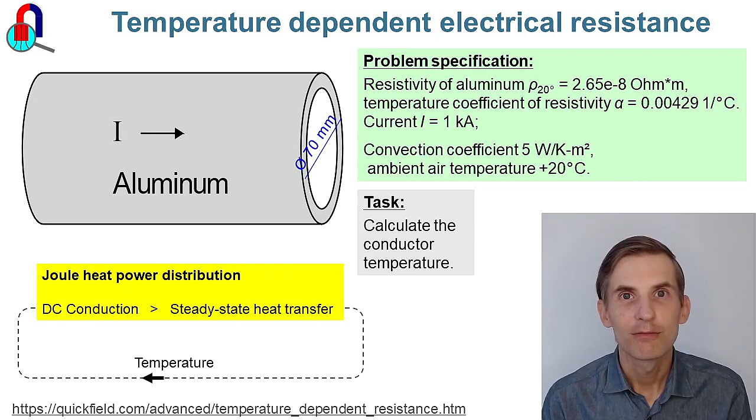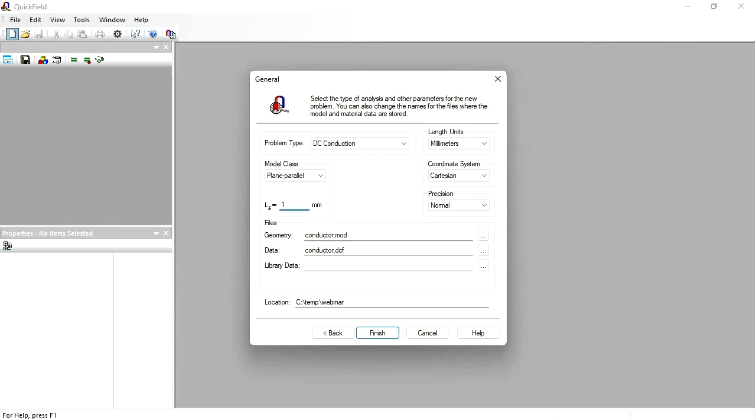Okay, let's start QuickField now and see how it could be done. In QuickField, I create new problem, conductor. Next. Problem type is DC conduction. Plate thickness is 1 mm. Length units are millimeters. Finish.

On the left you can see the problem pane and on the right is the geometry model editor window. You can draw the geometry model here or you can import the geometry model from an AutoCAD DXF file. The model is simple, so I'm going to draw it from scratch.

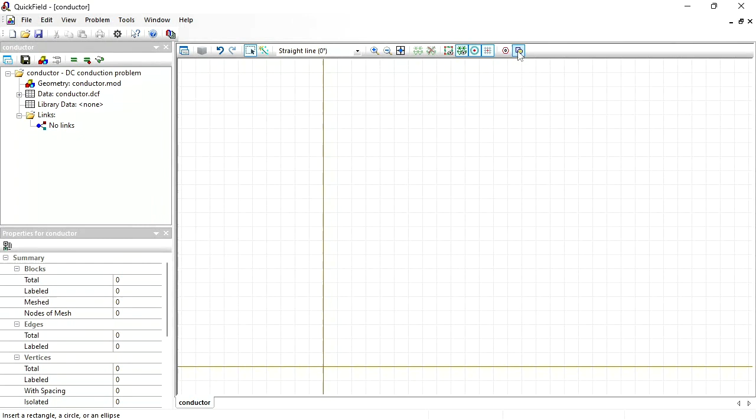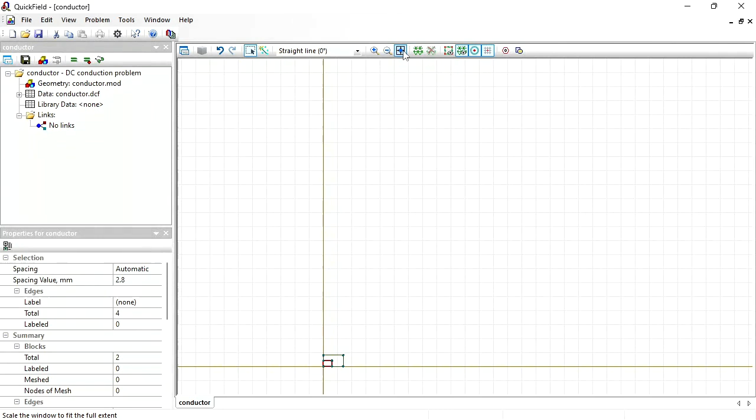First, I'm going to insert a rectangle with the dimensions 70 by 40 millimeters. Insert, and another rectangle with the dimensions 30 by 20 millimeters. Insert. Close. Zoom to fit. Now here I should switch to insert mode and add arcs, and I'd better adjust the grid settings to 10 millimeters. Switch to select mode and select and remove unnecessary parts. Now this is the geometry model.

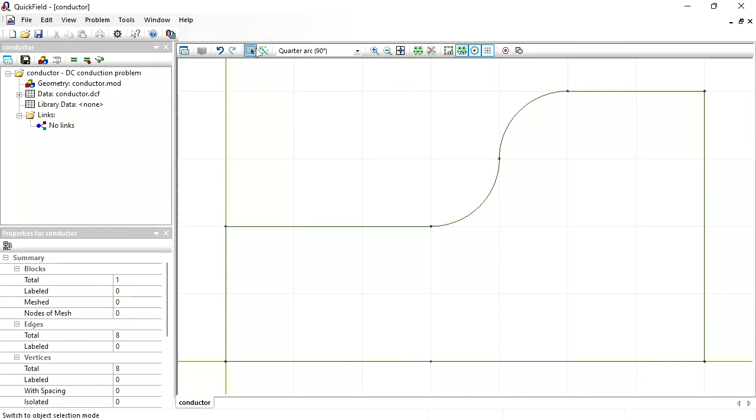Now let's assign labels. Through labels we can distinguish geometric objects and provide material properties. Switch to select objects mode, click the object to select and type in the label name here. This is conductor. This is the grounded electrode, and this is the electric potential electrode.

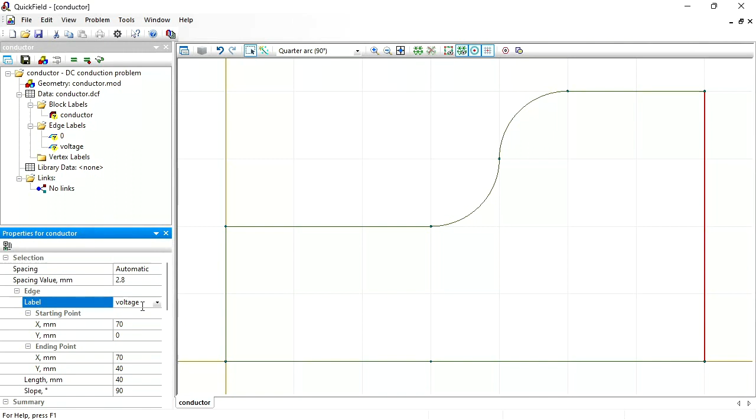Now let's provide physical properties for these labels. Double-click the label name in the tree. The grounded electrode has 0 electric potential. The voltage electrode electric potential is 0.02 volts, and for the conductor I specify electrical conductivity, which is 1 megasiemens per meter.

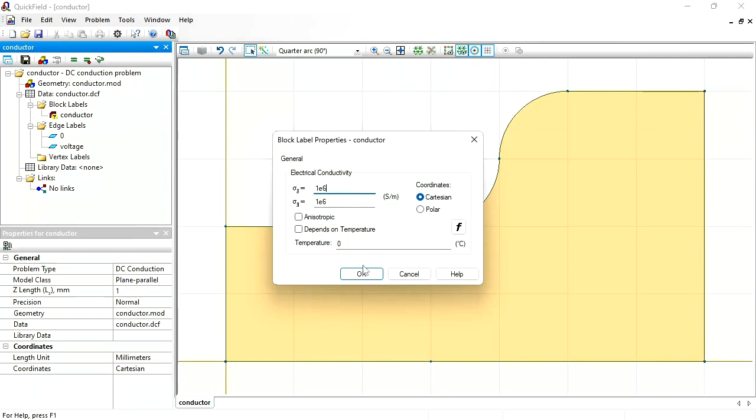Okay, before I start the analysis, I should build the finite element mesh. Just press this button and the mesh will be generated. Now save all problem files and solve the problem.

Let's take a look at the results. You can see the current density distribution, and it is not uniform. So the Joule heat distribution is not uniform as well. So I might expect to get a non-uniform temperature distribution. Let's calculate the temperature distribution.

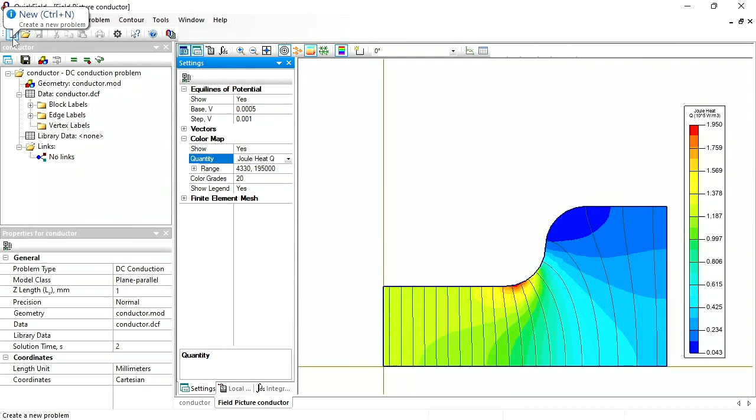I create new problem, conductor temperature. Next. Problem type is steady state heat transfer. The plate is thin, so it was possible to simulate the electric problem as a two-dimensional one, but for the thermal analysis, I need a 3D model.

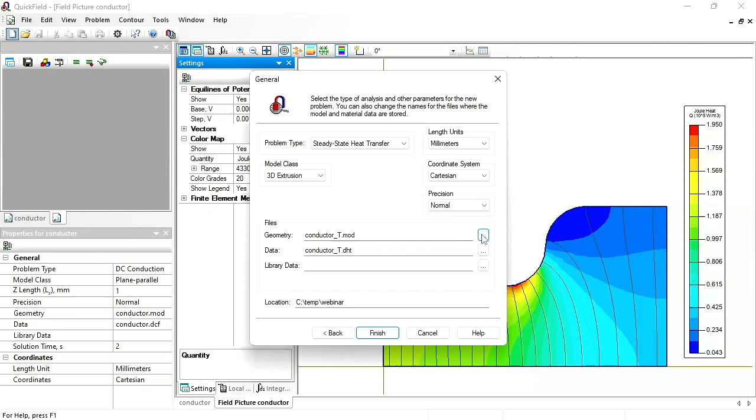The model class is 3D extrusion, and to save time on geometry model creation, I'm going to reuse the geometry model file. So I click the Browse button and look for conductor.mod. Here it is.

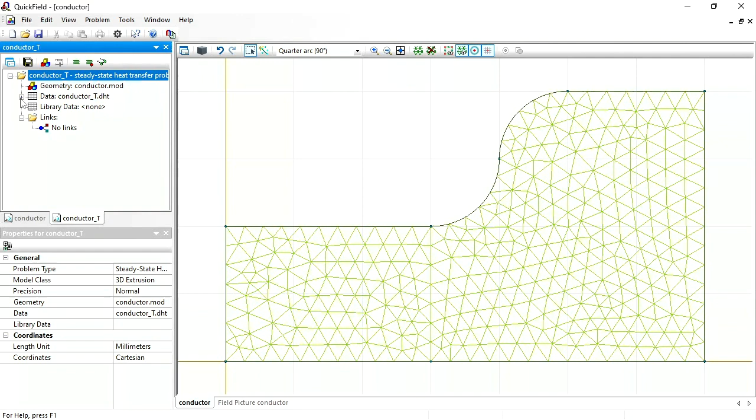Finish. To create a three-dimensional model from this plane sketch, I should assign levels to the objects. Click to select. Here you can see the levels 0 and 1000 millimeters. In fact, the conductive thickness is only 1 millimeter, so I type here 1.

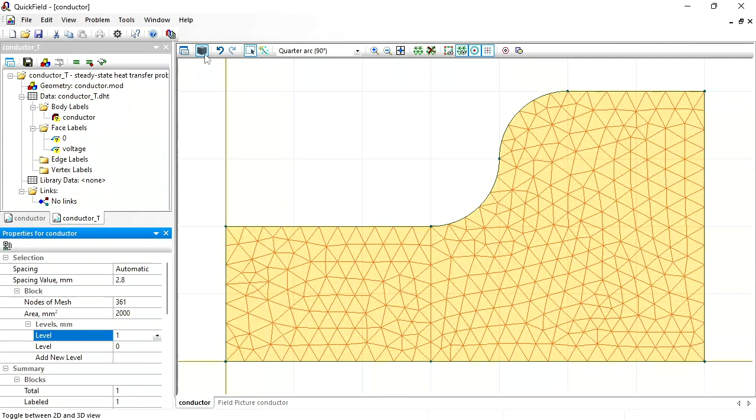Now I can toggle the two-dimensional, three-dimensional view. And here you can see the three-dimensional model.

Here again I should assign labels. Click to select and the face is selected. To select the body, I should click the selected face again. Now the body is selected. This is the conductor, and the thermal conductivity of the conductor is 50 watts per Kelvin meter.

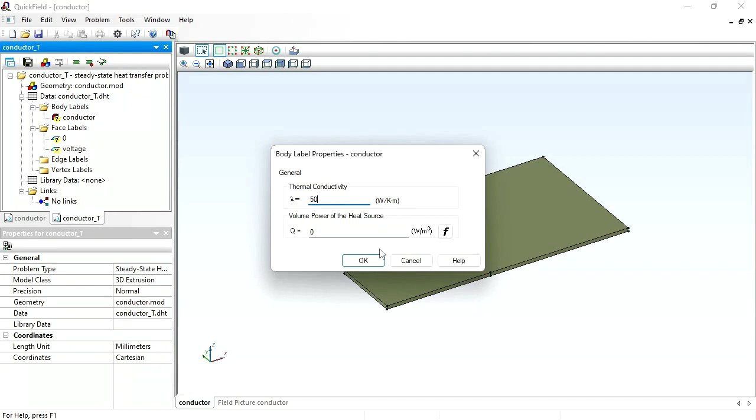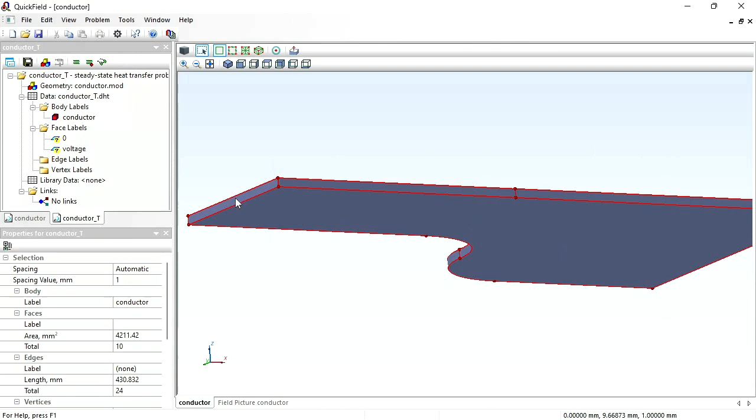Okay. Now this conductor is cooled on all faces, all but the conducting faces, cooled by the air. So for all these faces, all but the conducting faces, I should assign the convection boundary condition. Faces, convection. Ambient air temperature is 0 degrees and the convection coefficient is 10.

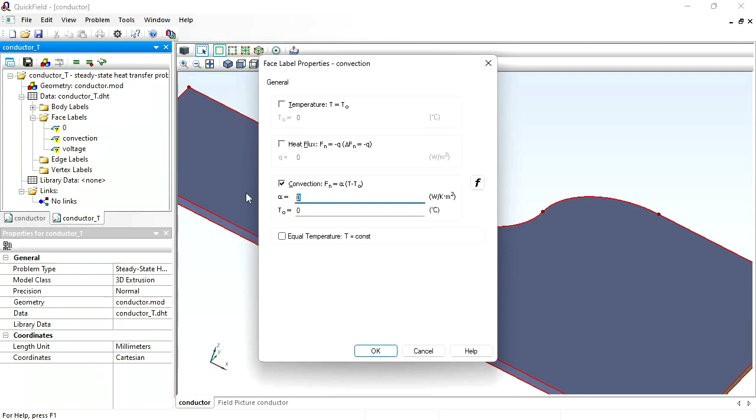These labels were used in the electric problem. I do not need these labels here, so I just double click and do not specify any properties here, and click OK. So now you see the 0 mark next to the label name. That means that this label doesn't hold any physical properties and it doesn't affect the results.

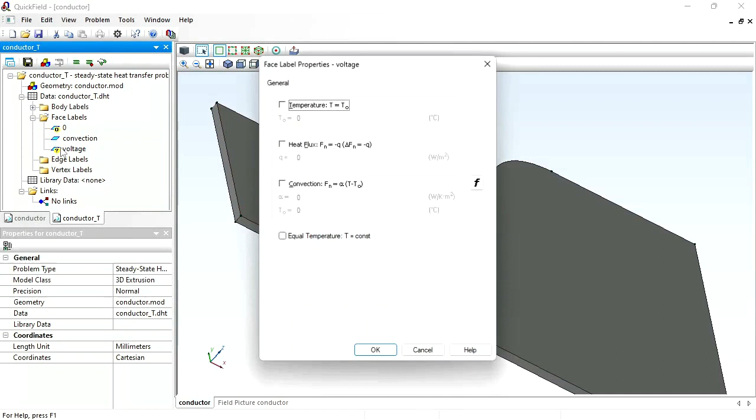Now I should specify the losses in the plate. Let's go back to the electric problem and calculate the losses value. I'm going to use the contour tool, click to select the plate, open the integrals, and here is the Joule heat in the volume. And I need to know the volume as well: 0.138 watts per 2000 millimeters cubed.

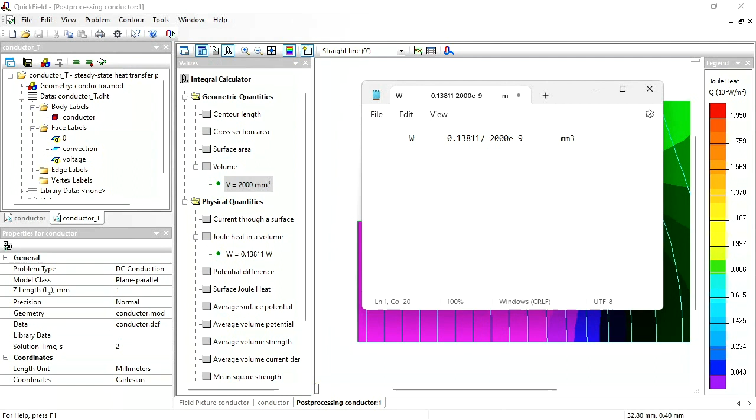In QuickField, you can type in not only the constant but also the equations. Millimeter cubed should be converted to meter cubed, which is times 10 to the power of minus 9. This equation I will copy and paste here in the conductor block label, volume power source.

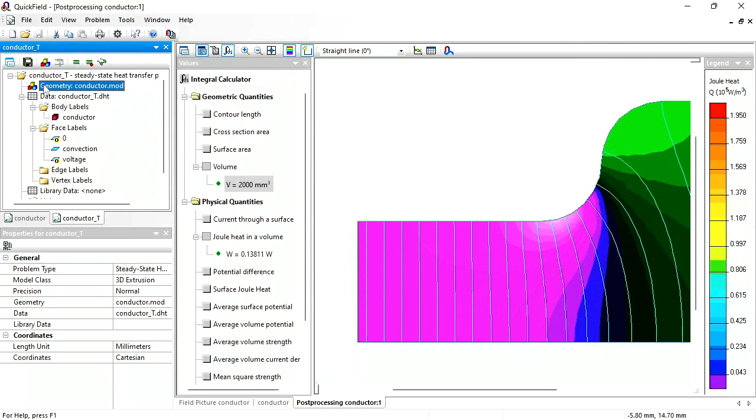Again, before running the analysis, I should build the finite mesh, mesh for edges, mesh for faces, mesh for volumes, save all the problem files, and solve the problem.

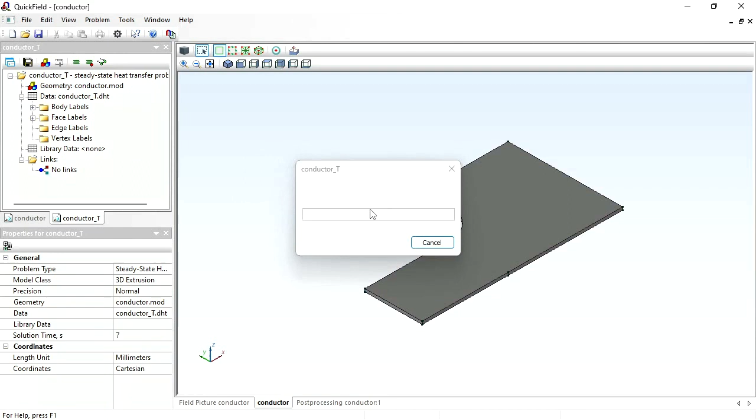Open the results. And here you can see the temperature distribution. If you adjust the scale from 0 to 3, it's almost uniform temperature, 3.3 everywhere.

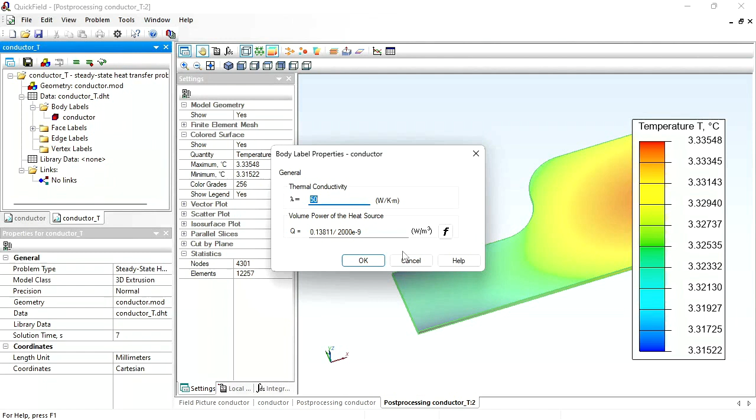We had specified the uniform power density distribution in the plate, but in fact the power density distribution is not uniform. Let's go back to the electric problem.

Here I will adjust the color grades, let it be 5. Let's divide the geometry model into sections, 5 sections will be, and for each section calculate its specific joule heat power density. To be able to do so, I need to open the geometry model.

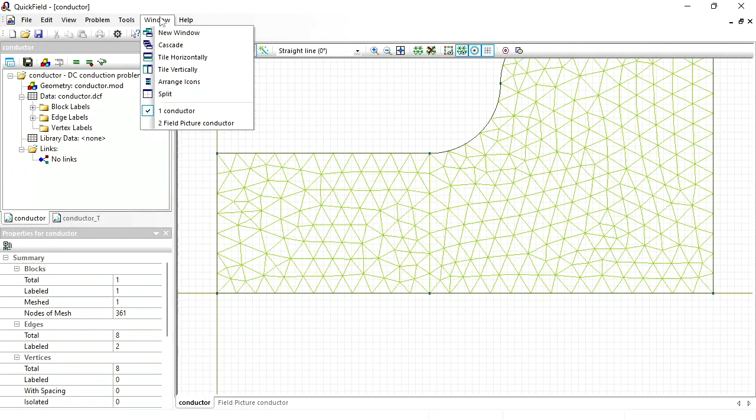Let's put them one above another, switch to insert mode, and draw the boundaries of the color zones. Something like this. And this. And here. And the red zone is here.

Switch to select objects mode, select and remove unnecessary parts. Next, I'm going to run the simulation again to see how my artificial boundaries match the color boundaries.

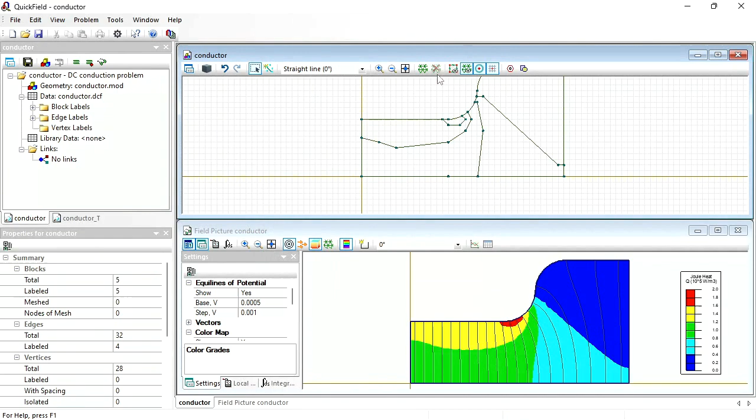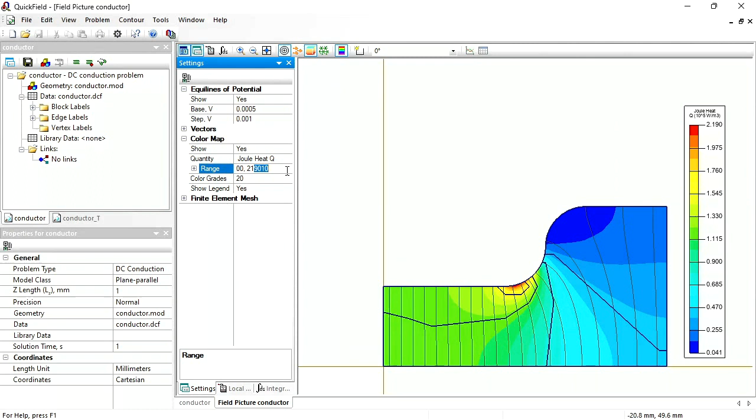Build the finite element mesh and solve the problem again. Open the results. Again, adjust the field picture. The range from 0 to 200,000, and the color grades is 5.

It seems I need to adjust the boundaries in the geometry model. Again, let's put one window above another. Now this line should go somewhere here. This line should go there. And this line should go here. Okay, again, remove unnecessary parts.

All these regions are in fact the same conductor, so these internal boundaries don't affect the current density distribution and the power distribution.

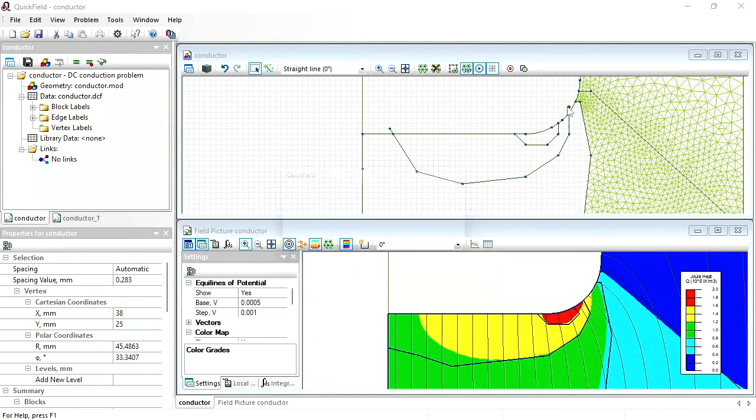Build the finite element mesh again and solve the problem again. Again, adjust the field picture, adjust the range, and the colors. For each region, you can see the specific power density.

For this region, it is 0.2. For the blue region, it is 0.6. For the green region, it is 1. For the yellow region, it is 1.4. And for the red region, it is 1.8.

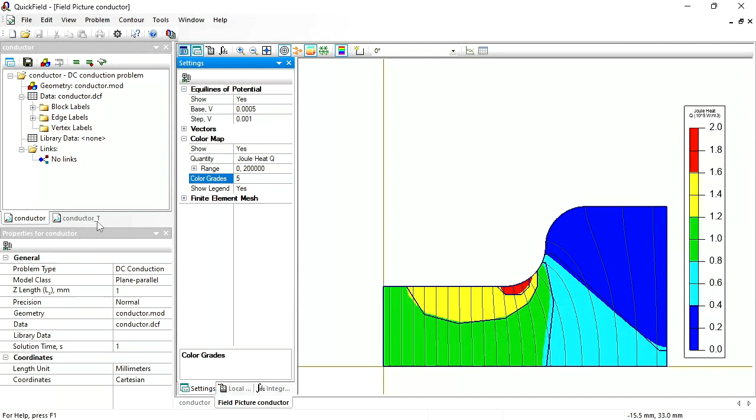Okay, open the thermal problem. You see it is based on the same geometry model, so we have exactly the same boundaries in the thermal analysis problem. Toggle to the three-dimensional viewer.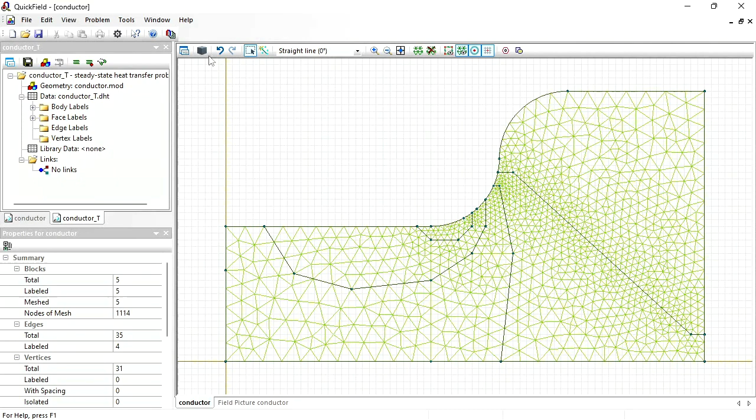And here, instead of the label conductor, I'm going to assign a different label. This would be red. This would be yellow. This would be green. This would be blue. And this would be dark blue.

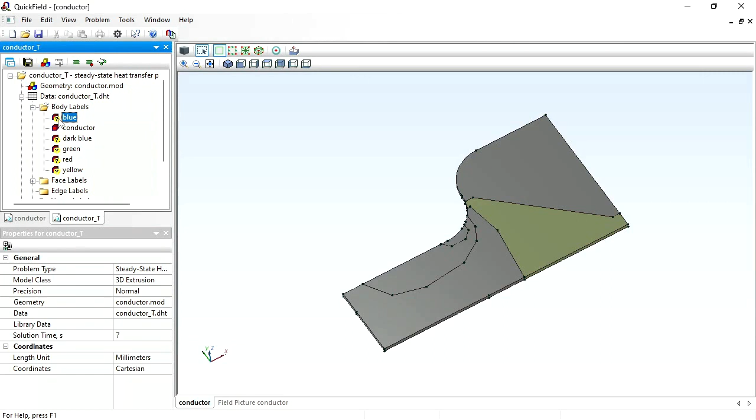And for each region, I will specify specific joule heat power density. For the red region, thermal conductivity is 50 and the power density is 1.8 times 10 to the power of 5.

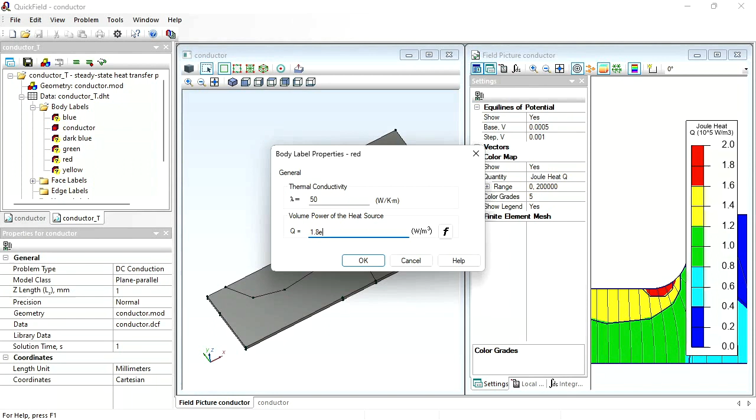For the yellow region, thermal conductivity is 50, and power density is 1.4 times 10 to the power of 5 watts per meter cubed. For the green region, it is 1 times 10 to the power of 5 watts per meter cubed.

For the blue region, it is 0.6 times 10 to the power of 5. And for the dark blue region, it is 0.2 times 10 to the power of 5.

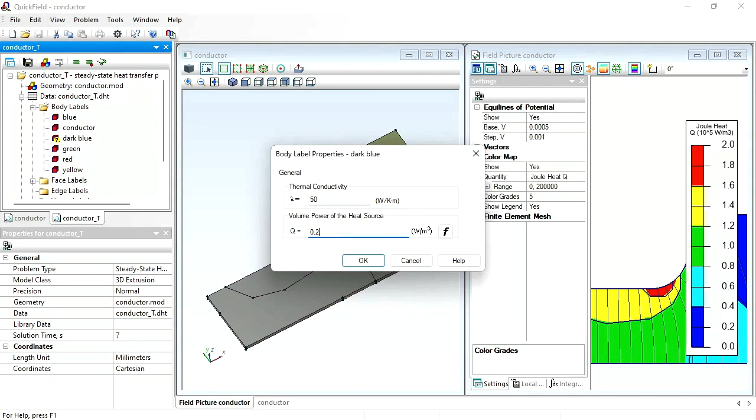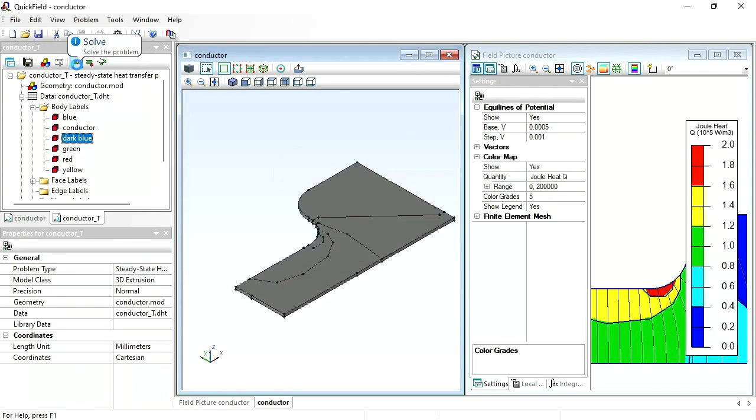Now we have different regions with different joule heat power. Let's build the finite element mesh and run the thermal analysis again. Let's take a look at the results.

Now you see that the temperature distribution corresponds to the power density distribution. In the narrow part, where the current density is high and the power density is high, the temperature is higher, and in the wide part, where the current density is low and the power density is low, the temperature is lower. The temperature difference now between cold and hot part is 1 degree Celsius.